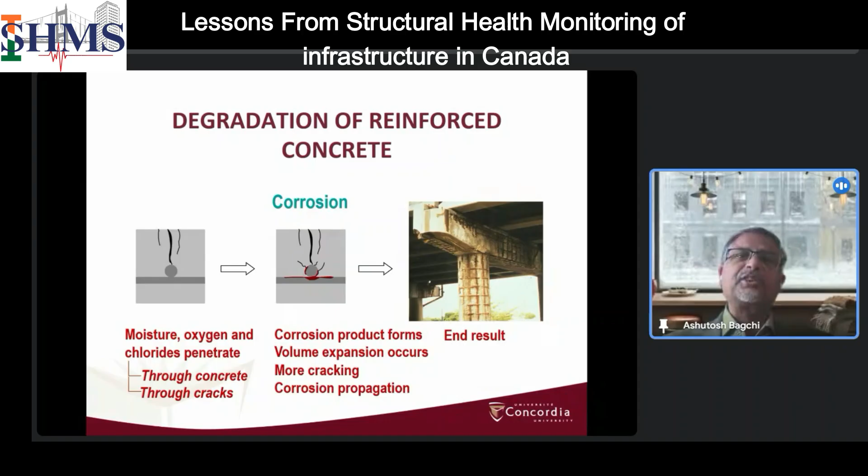You know, in concrete structures, corrosion is a very harmful aspect that we encounter all over the world, depending on the weather. In Canada, although it is a cold country, many times because of the fluctuation in temperature, the snow cleaning operations and all these things can create stress on this kind of structure, which accelerates corrosion. So when we rehabilitate these structures, we many times use modern materials along with the older materials. We use innovative structures. But to maintain these structures, monitoring is important.

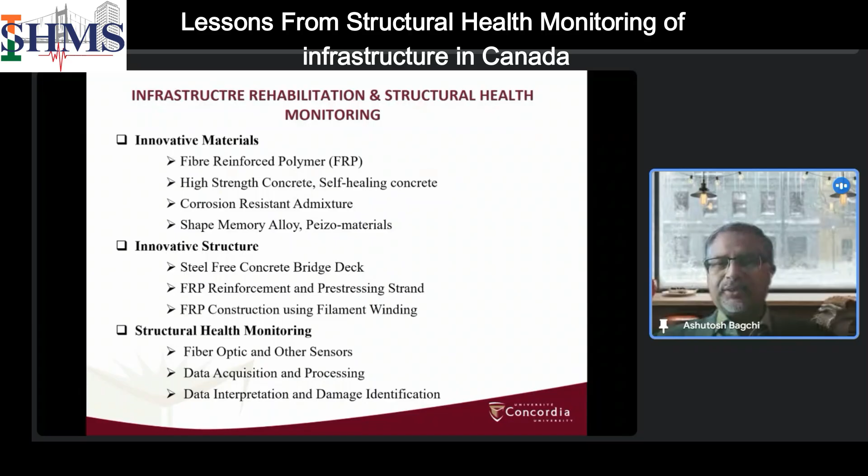So in Canada, they tried different types of innovation in structural rehabilitation or creating new structures. For example, we were using FRP materials, fiber reinforced polymer materials, early on while developing. There was no code or anything. Then they started developing the code and started using it on a regular basis. Then there is another kind of bridge construction they started doing, which is called steel-free deck.

Steel-free deck is basically, as the name indicates, we don't use any steel internally, which means that it's not fully FRP reinforced or polymer reinforced concrete. It is still concrete, but instead of using steel bars, a steel plate is used externally to promote arching action in the bridge deck. For example, in this bridge deck, there is a steel girder here and here, and there is a steel plate connecting them. So when there is a load coming from top, it tries to push these girders away, and that creates arching action. And concrete is good in taking compression. So that's how it takes the compressive force.

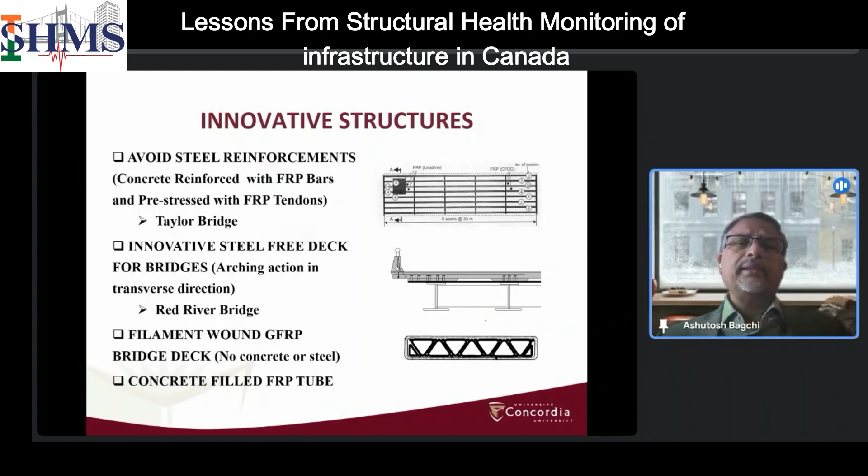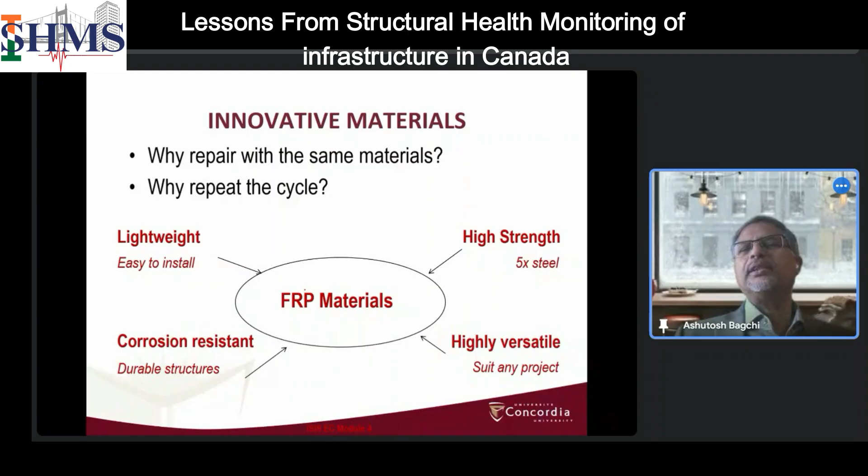Then other kinds of structures they use, like filament winding. I'm not going into details with this. So FRP materials became quite popular, but durability of FRP material was not well known at that time, because it is about 20 years ago they started. But the attraction was it was lightweight, high strength, corrosion resistant, and versatile. So that's why most of those bridges, wherever they used FRP or steel-free deck or any kind of innovation, they instrumented them.

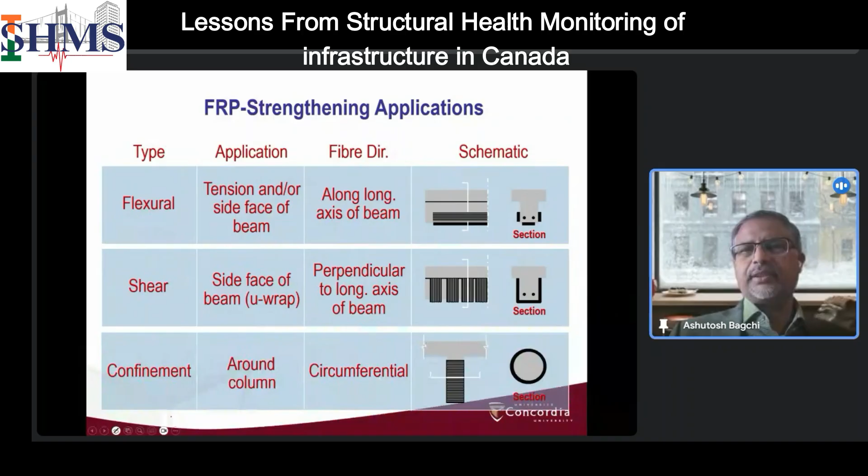So these are some of the applications for FRP where they used it for flexural strengthening. Now it is well known. Many of the countries have adopted them. At that time, it was evolving. So they were developing different layouts, different design processes, etc., for shear, confinement, etc. Now, what do we do?

Why do we need monitoring? We know that a structure deteriorates over time and exposes its deficiency, and many times it encounters excess demand. For example, some of the bridges which were designed for a certain level of load now have a higher load demand because traffic increased, congestion increased, or the speed limit increased. So that increased the demand on the structure.

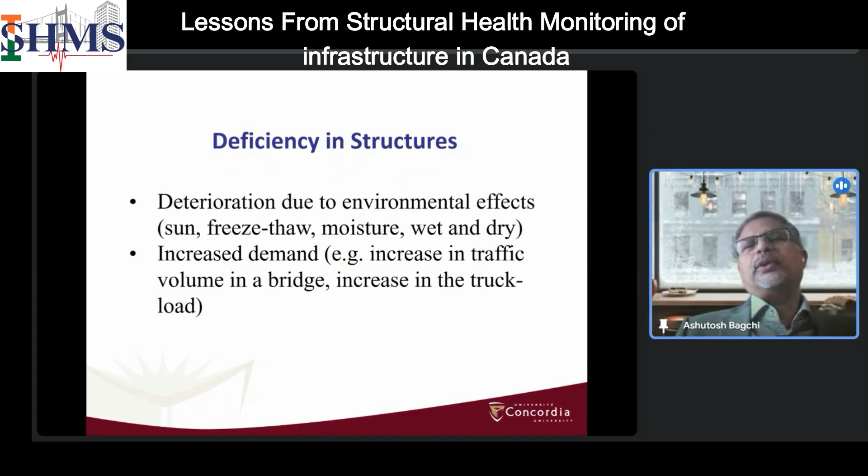Now, when the demand on the structure increases, durability and performance of the structure will get affected. When environmental effects like aging, freeze-thaw, moisture, etc. attack the structure on a continual basis, its capacity reduces. So we need to know what is going on in the structure so that we can maintain it regularly. That's why evaluation of a structure is very important. We all know this; I'm just recapping.

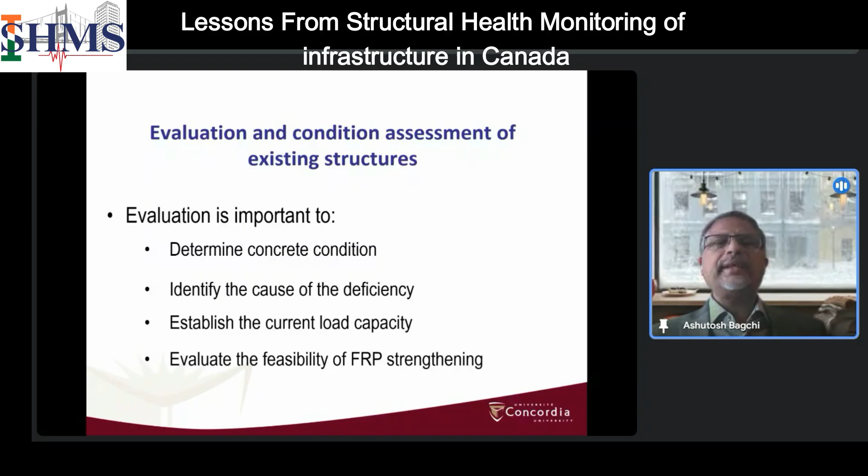This slide essentially says that when we are using innovative materials, or we want to know the behavior of the structure. I'll give you an example. Say you repair a structure with a certain kind of solution which is not standard, so you make some design assumptions. Then we need to ascertain that the design assumptions were right. The only way to know is by instrumenting the structure and monitoring its performance over time.

So we need to understand the behavior, prove any design concept we adopt, then detect possible damage or degradation. This is a regular objective in any structural health monitoring. Another important aspect is to estimate remaining service life. Why do we need to do that? Say I have a bridge which is built for a 40-year period. The design life is 40 years.

When I monitor and look at its performance, maybe after 10 years it starts showing some distress. So I do a repair. It enhances its performance and life, but it still deteriorates. So we need to estimate how long I can go on like this until I make a decision, as the owner, when to replace this bridge. That's why assessing the service life is important.

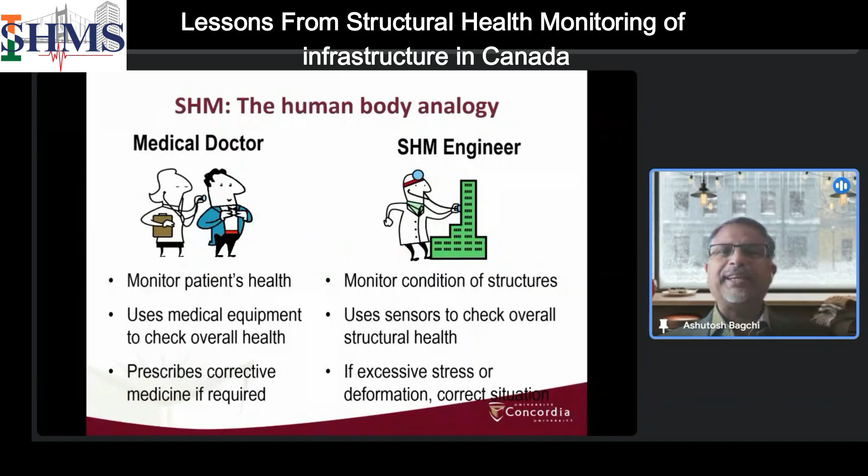I think most of you know the analogy between human health and structural health. In human health care, we take help of different diagnostic measures. We see health professionals, doctors, and based on different tests, they give us a prescription. Similarly for SHM, we monitor the structure, measure different performance or response characteristics, and based on that, the engineer diagnoses the condition of the structure and prescribes remedial measures.

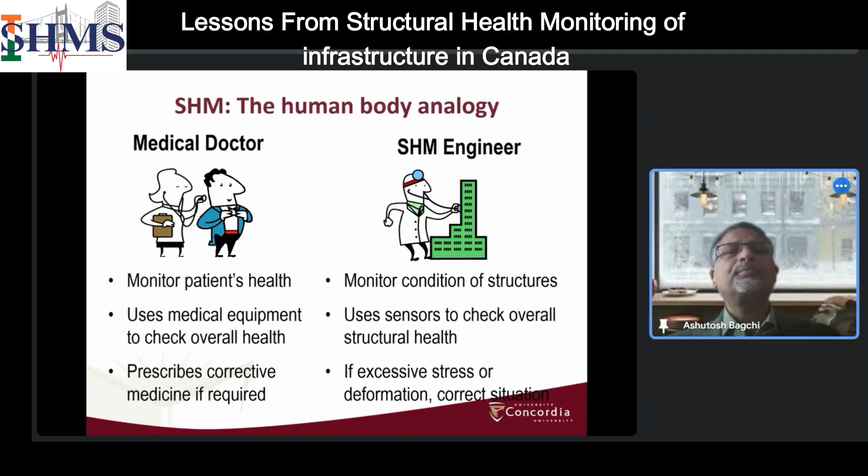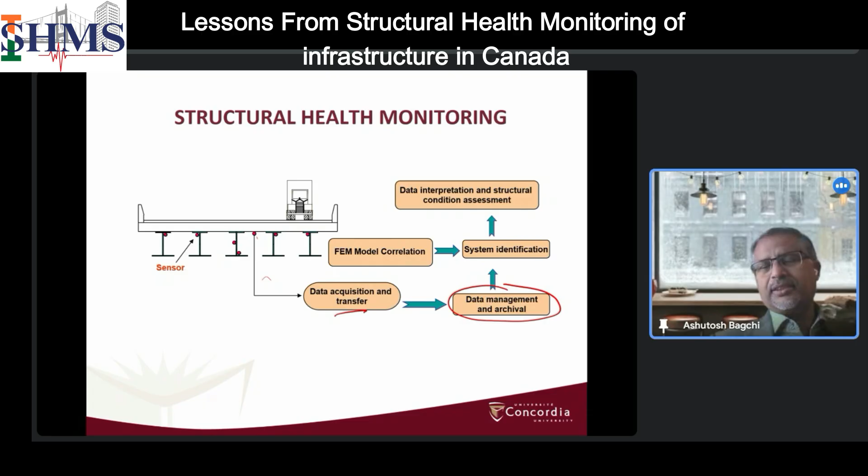This is the typical layout of a structural health monitoring system, where you have sensors from which the data is collected, managed and archived. Then system identification is done. I'll talk about what system identification is in a later slide. Sometimes we build a finite element model, correlate the structure, and interpret the data and structural condition based on what we have from the field.

So we carry different equipment into the field, like ultrasonic devices and acoustic devices, and test the structure. Sometimes we do a load test by putting a truck with standard weight and do a static field test, and collect data. Many times we do a dynamic test, meaning an ambient vibration or forced vibration test, and collect the data from that. These are all called periodic tests.

And then we come in the realm of continuous monitoring. So continuous monitoring is where we put the sensors in the structure permanently, continuously access the data, and evaluate the structural condition based on that.

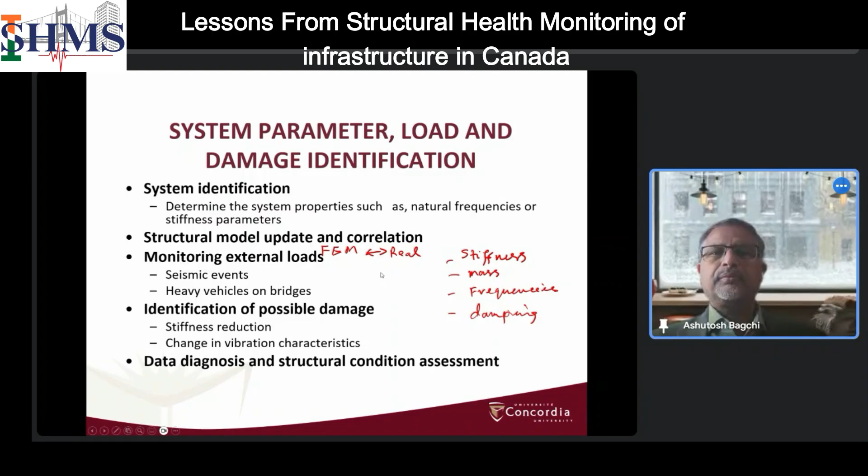So vibration monitoring is a very important technique we normally use. It is not a continuous process, it's periodic monitoring. So we take vibration measurement instruments like accelerometers, velocity meters, etc., instrument the structure temporarily and excite the structure. How do we excite the structure? Sometimes we put some kind of mechanical shakers on the structure, or if there is a natural way of vibrating the structure, called ambient vibration, we take those signals. And based on that, we figure out the system properties.

And also, if we do it on a regular basis, say every year or every 6 months, that will allow us to find the difference in behavior from one stage to another and help us localize the damage. So this is an important aspect: localize the damage based on global quantities.

If we know the damage is in a local area, we can do local tests like ultrasonic tests or ground penetrating radar or whatever we need. But if we don't know locally, then this provides a global method to identify the areas where there could be a problem. And then we can send our team to do local measurements. And that way it becomes very cost effective.

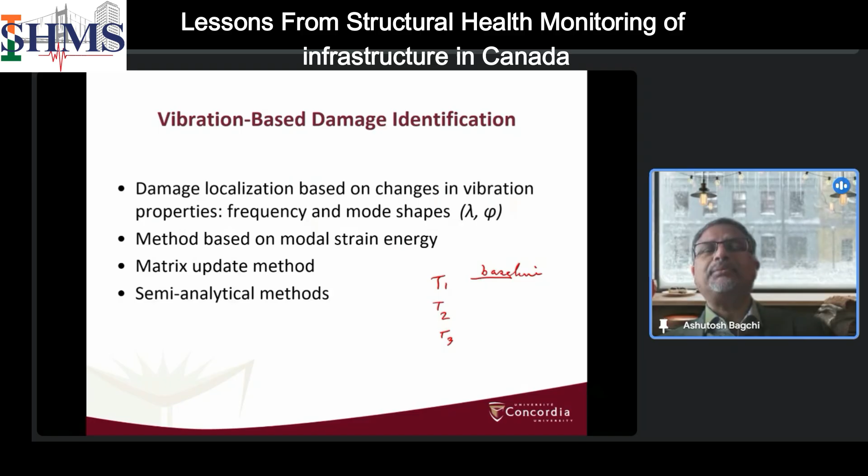It is not only for damage. Sometimes we use this to identify if there is any problem with the sensing system itself. So that is just the basic information. I'll give you some examples from Canadian implementation of SHM systems.

The time when they constructed this bridge, there was no code for this kind of bridge. Code, in fact, did not allow. But Canadian code has some mechanism. It says that if you apply any kind of new technique, then you have to prove that it does better than the conventional design. So that's why they instrumented this bridge at that time, and we are talking about 91 to 95 in that period, and try to demonstrate the performance of the structure.

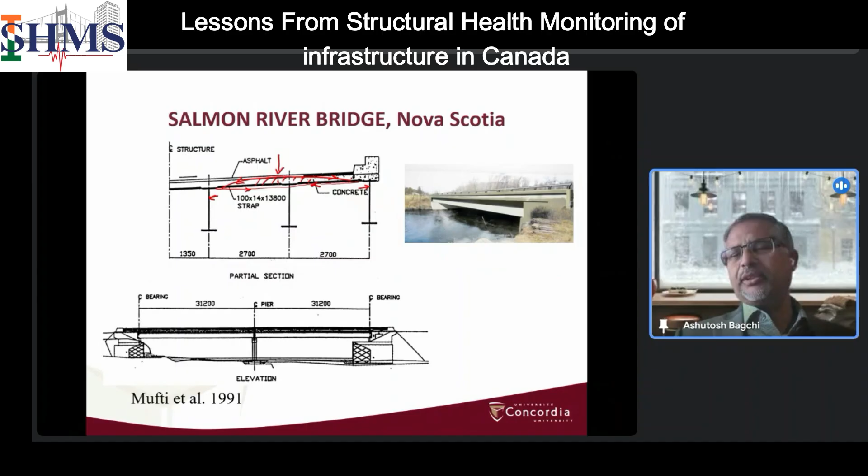So from time to time, they measured what is the load distribution in the structure. They did static load test, vibration test, and all these things. I'm not going too much into detail, but that experience was very valuable. So based on that experience, they constructed many other bridges in Canada and some in the US. And of course, design evolved a little bit over time. It got included in the code.

So that's how procedures in the code also remain live. It allows this kind of changes. Same thing with the changes with FRP. Initially, there was no design code, but allowing construction in a limited scale and monitoring and analyzing the monitoring data helped them to develop different design provisions.

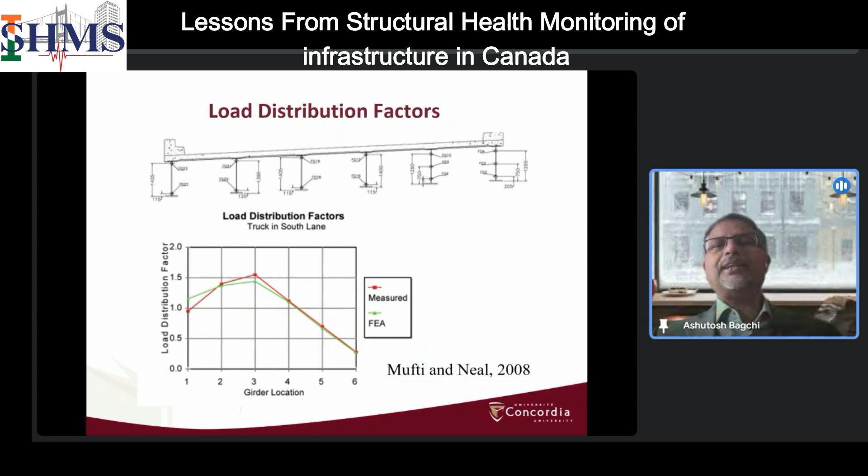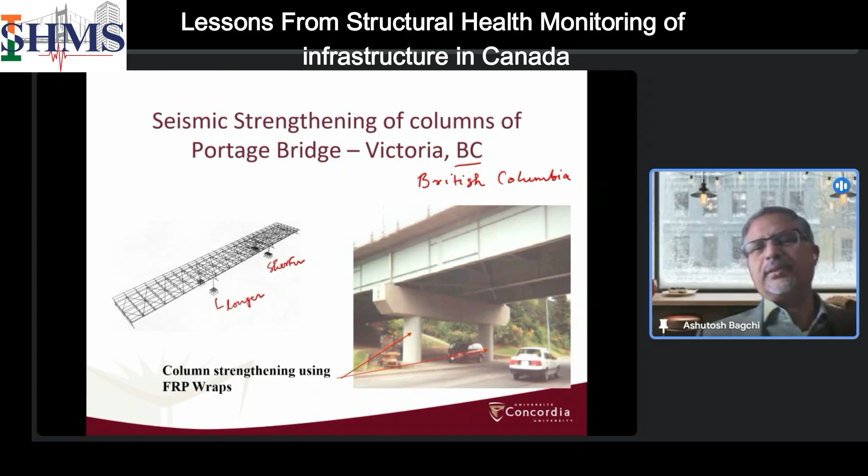So what is the advantage of that? The advantage is that it confines the core of the column. Through different tests, it is quite well known that if you confine a column, its axial load carrying capacity goes up. If it is a longer column, if the confinement is done properly in the hinging zone or the end zone, then it behaves in a more ductile fashion, because the concrete remains in one place, and the steel gets enough strain limit to yield and generate a full hinge.

This is there. See, this was in 2002 or 2003 period. They had this online monitoring system where they could access and process the data from a remote location.

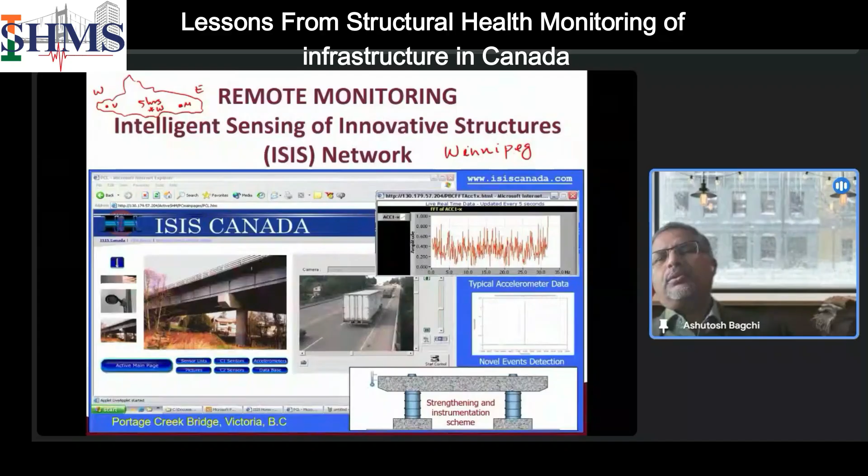So there was a network of centers of excellence in Winnipeg. Winnipeg is in the middle of Canada. Canada is a very big country in terms of land mass, right? And it is a little bit longer. So it looks like this. So this is east, this is west. If you take a flight from here to here, so this is Montreal and this is Vancouver, it takes 5 hours. So you can imagine how much longer it is. So Winnipeg is right in the middle. And they had this center of excellence where they had this monitoring station, and the bridge was in Victoria. So it worked out well at that time.

They also did field tests from time to time, doing static load tests. So they would run a truck with predefined load very slowly on the bridge, and then see what is the level of strain change in some of the girders. So they would measure this in each girder, and that will help them to find out what is the load sharing between the girders, because load sharing is an important aspect in bridge design, particularly when you design multi-girder bridges.

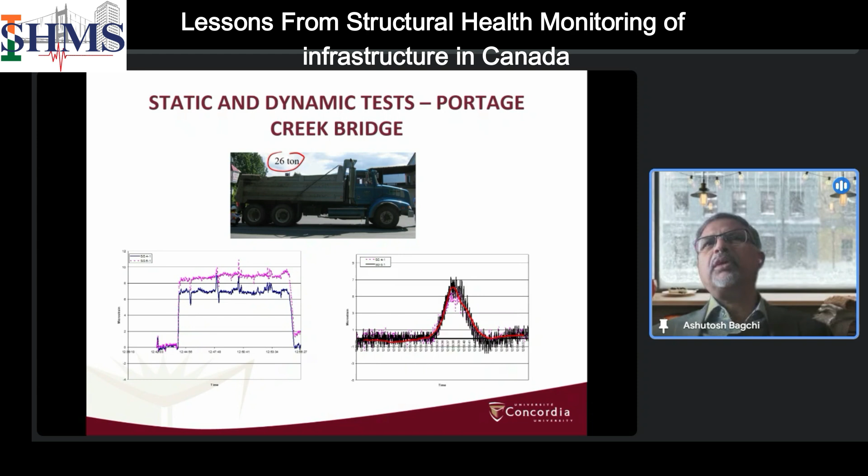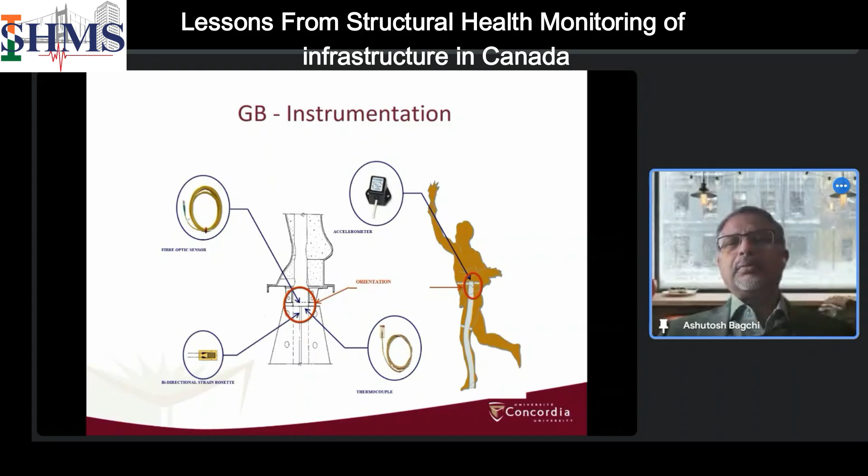Now, the reason why this project was significant is this is one of the very early SHM applications in Canada. SHM in the modern sense, like using fiber optic sensors, wireless sensors, and those kind of things. So these are some details of the structure, and then they monitored the structure for more than 5-6 years to ascertain that all the repair works were in good shape. They correlated with wind, correlated with regular ambient vibration, and all kinds of things.

And that is the time they started applying fiber optic sensors in civil engineering structures. At that time, fiber optic sensors were not very popular. They were very expensive, and not very well tested. So these are some of the early pictures from there. They also tried to create something called a rugged version of FOS, fiber optic sensors, because fiber optic sensors are very fragile.

So it is like a simple fiber coated under different kinds of jacketing mechanisms. As long as it is protected within these plastic jackets, it is okay. But the sensor part is usually exposed, and they are very brittle. So that's why installing in the field is very, very tricky. If it is not installed properly, then it will not work, so all the expenses will go to waste.

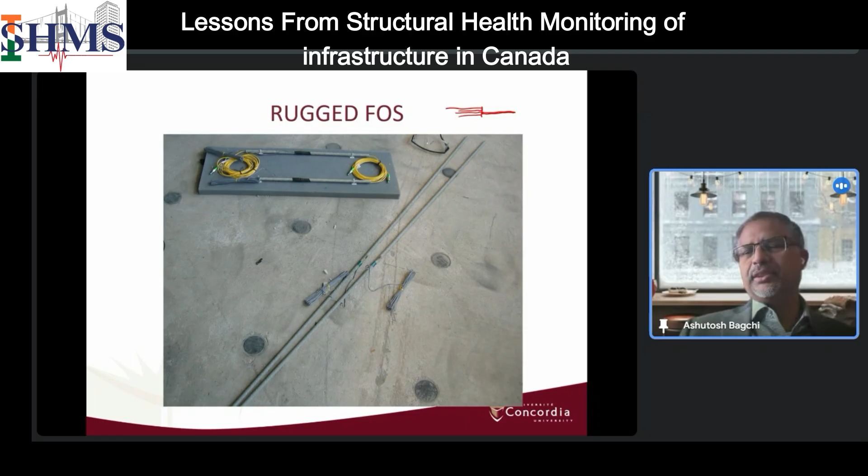So they tried different ruggedizing mechanisms, meaning pre-install in a different setup and just plug in at the site and all these things. Obviously, they needed to study its efficacy and performance. These are some of the tests they did in the lab. We also did something in our Concordia labs.

And what we also did is weathering effect, because Canada is a country which sees extreme weather. Extreme weather means in summer season it is quite hot. It could be 35, 40 degrees sometimes, not all the time. In winter time, it could see minus 20, minus 30 even. Not for extended periods, but minus 15 to 20 would be almost regular.

So in that kind of temperature variation, we need to know whether this kind of sensing system, monitoring system, will even work outdoors. So there were some tests to figure out the durability of these kinds of sensors.

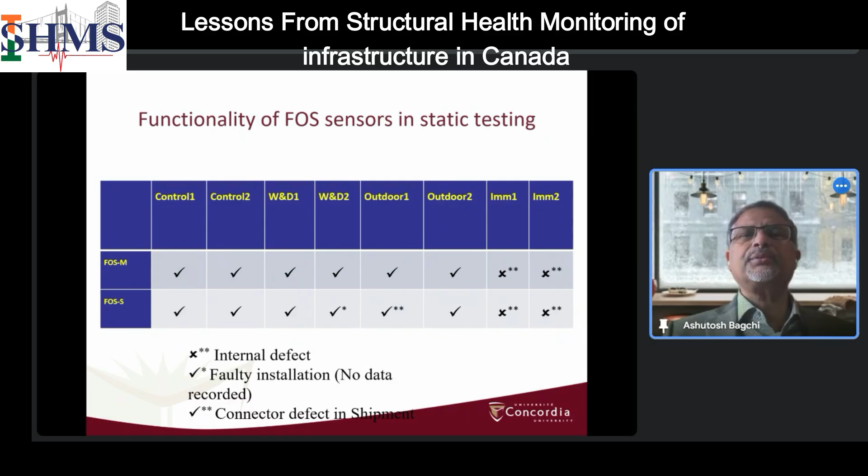And also in fatigue condition, like especially if you look at a bridge, it undergoes cyclic load. Like every time a truck passes, the bridge midspan deflects, and then the truck goes away, it comes back. And because these are dynamic loads, there is also some kind of vibration that happens followed by the passing truck.

So because of that, it might set in some kind of fatigue, especially in reinforced concrete, not so much in FRP reinforced concrete. There could be significant effect on this kind of fatigue load. Steel bridges have more effect because steel is known for its fatigue problem.

So the tests indicate that yes, FOS in all kinds of conditions, like in control conditions, wet and dry, outdoor, meaning summer and winter, immersed in different kinds of solutions, they perform quite well. So durability wise, FOS seem to be good. These are two different versions. One is directly installed. This is installed on a supplemental bar. And these are traditional sensors, electrical based, which sometimes work, sometimes do not work, especially in extreme conditions.

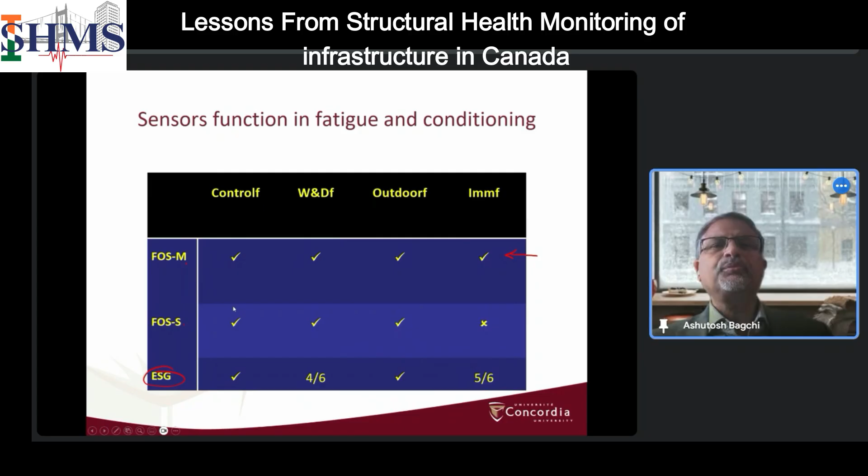We also did some research on application of SHM systems in large structures like dams. Now, in a massive structure, environmental and seasonal effects change or affect the outcome of the monitoring system quite drastically. So we need to figure out a way to extract or isolate the environmental effect. So there are many different techniques.

We could use statistical methods or artificial neural network methods to isolate the effects. Analytically, some people tried using the existing theories of thermal expansion, etc. But that could account for only temperature-related issues, but not other things.

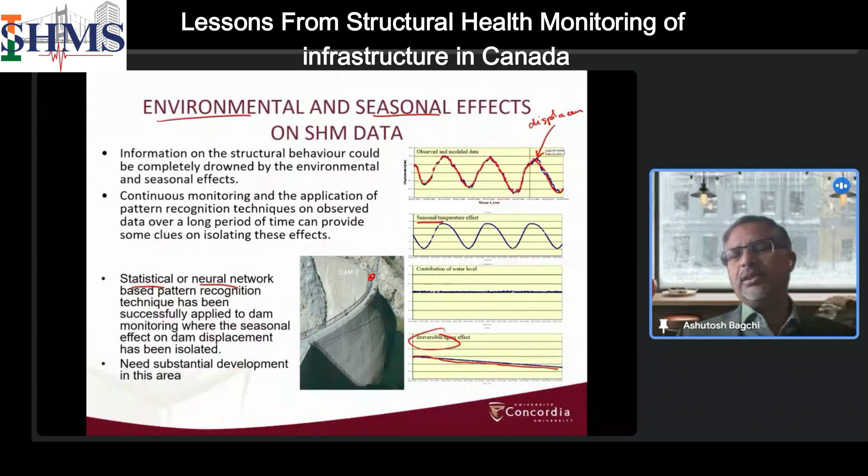So this kind of monitoring gives us good information in terms of the structure's operational behavior and the long-term drift in its performance.

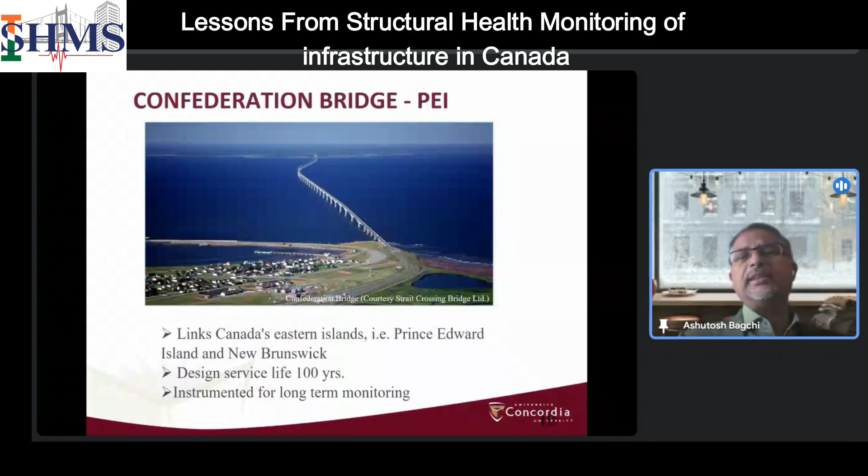This is an iconic bridge in Canada. It's in Eastern Canada. It's called the PEI Bridge. PEI is Prince Edward Island. It's an island in the east of Canada, which is around 13 kilometers away from the mainland. So the only mode of communication was ferries. But then in around '97 or so, they constructed this bridge connecting the mainland to this island. It's called Confederation Bridge. And some of the critical spans of this bridge are instrumented for long-term monitoring.

Now, long-term monitoring helped maintenance of this bridge in a big way, because when this bridge was constructed, many of the things they didn't know. They assumed that this is how the bridge will behave, or the environment will react to the bridge in certain ways. So they devised solutions in anticipation.

But since they monitored, they could now validate or update. Say in the winter time, part of the ocean freezes around this. And in some of the areas, it may freeze, but not fully freeze. So the ice blocks will move along this. So when it moves, you see these piers, it will hit the piers. So they had to account for that also: what is the deterioration that can happen because of moving ice floe.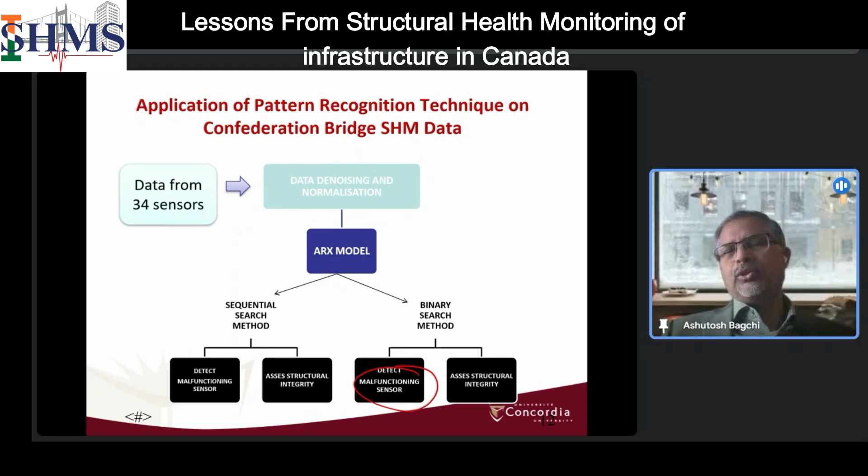So the technique basically tries to isolate based on the pattern. Say we have a structure, a bridge, let's say, and we have sensors at different points. So when this bridge deflects, these sensors will give us corresponding information, right? Now, suppose out of these three sensors, this one gives different output, then obviously visually we can say that something is wrong, either with the sensors or at the location of the bridge.

Now, if the bridge is an elastic structure, even if there is damage, the post-damage version will also be sort of elastic, right? If the sensors are connected to that, maybe overall deflection will change, but not one sensor giving an abruptly different result. So from that, you can figure out that if this sensor is giving this kind of information, then there might be something wrong with the sensor. Okay. But if it gives excessive deformation, but with the same pattern, then it may be structural damage.

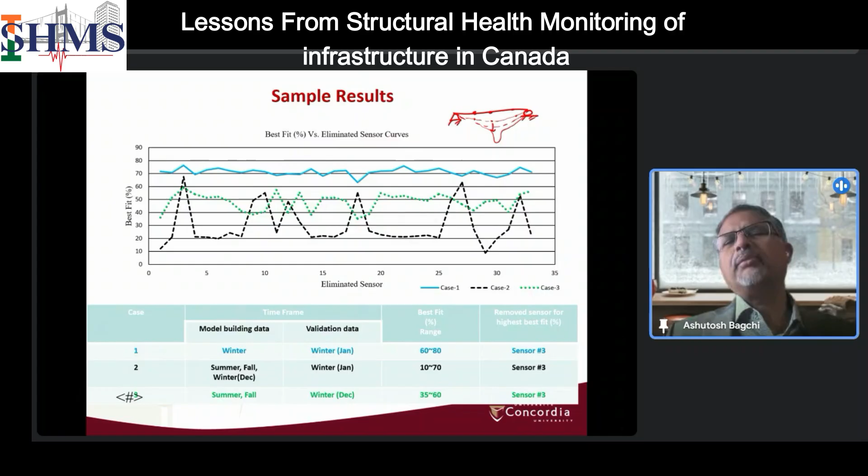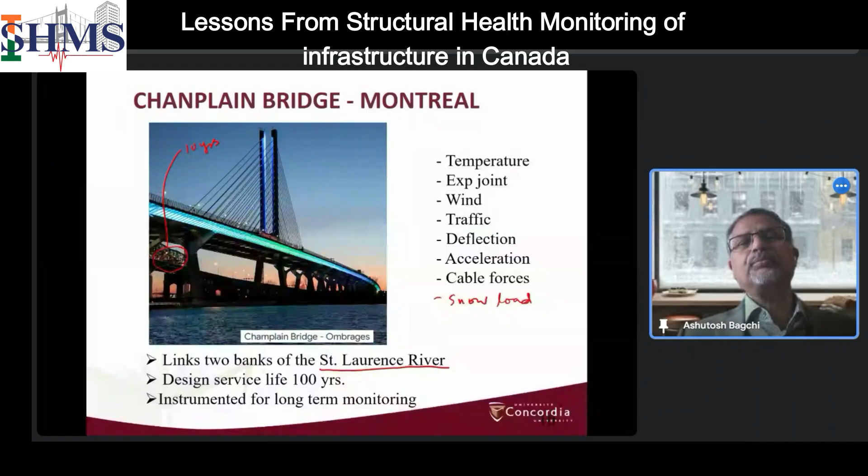We also did some tests on our campus buildings for vibration using a type of integrated sensor; it integrates an accelerometer, a velocity meter, which is essentially a geophone, and also special circuitry to amplify the low amplitude vibration, because sometimes when you measure ambient vibration the amplitude is very low, so sometimes the data integrity is compromised, right? Or the noise kills part of the data. So there is inherent hardware level amplification of the vibration data.

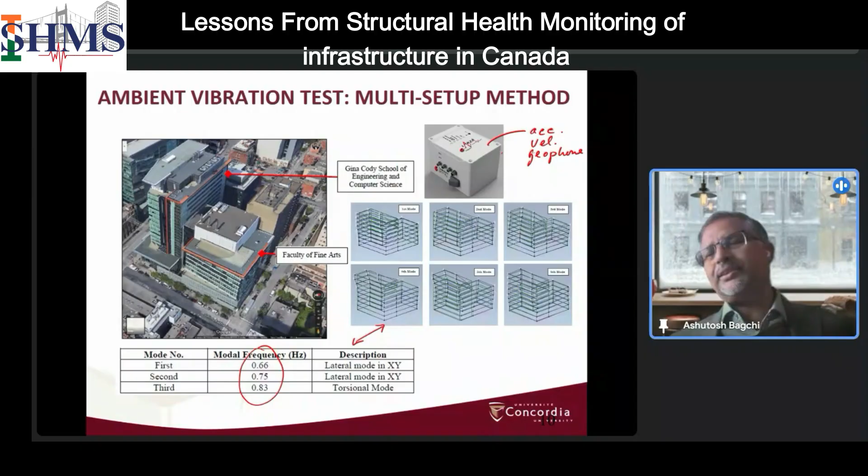So from that, we use different system identification methods to calculate the frequencies and the mode shapes. Okay. Since this is done for the first time, the only way to verify is the finite element model. Okay. So the other way to do it is repeatedly measure it, and see that there is consistency among the results.

Now this is a snapshot of the activities here. There are many other projects. I know it's not important to bring everything, just to give some snapshot. But what is important to recognize, what are the challenges in these kind of projects? Some of the challenges were recognized early on and they tried to mitigate. Some of the challenges are still being recognized.

But some of the major challenges that were recognized early on is optimal selection of sensor type and placement. That means if I want to monitor a structure, what kind of sensors I need and what kind of parameters I need to monitor and where we'll place this sensor. Okay. If I have a damage type and location well known, then I have no problem. I can select the appropriate type of sensor, location is known, that's okay. But generally speaking, we don't know many a times because the overall structure looks good or bad, okay?

But to monitor it in a scientific way, we need to find a mechanism to install the appropriate type of sensors in appropriate locations. So I think that can be done with modeling, simulation to know the structure well before we decide that these are the critical points where the sensors need to be installed.

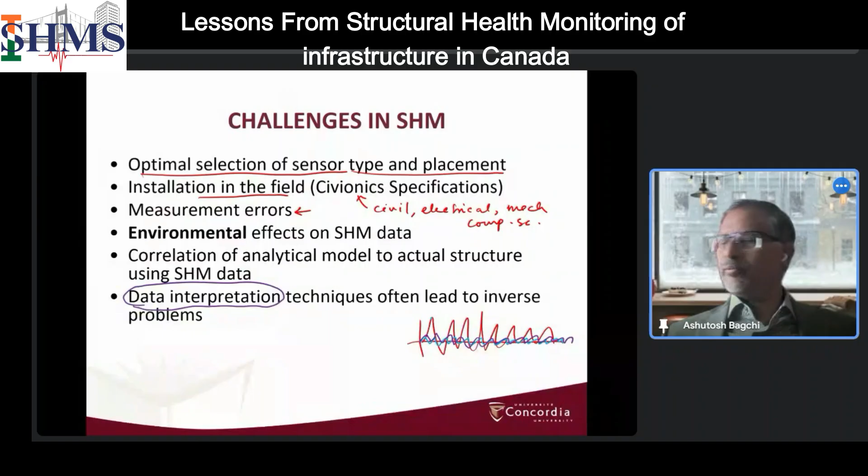How to use SHM information? We can use it in different systems. In bridge management system, if it is related to bridge. Dam safety assessment system, if it is related to dam, and so on. Data fusion is often a necessary thing. Data fusion means you have different kinds of data, like inspection data, vibration data, strain gauge data, all kinds of data with different ranges and behavior. How do we fuse all this information to interpret the data appropriately? And the final objective is this: condition assessment and prediction of remaining service life. Many a times we can use this as life cycle assessment, not just costing, I would say assessment.

So what does it mean? You have a bridge built for 60 years, but at the end of 40 years, you see problems, right? So if you demolish the bridge at this point and reconstruct, it will cost some money. But if you can, through SHM, extend it to really 60 or 70 years and then construct, then it has a different cost.

Let's say reconstruct here, so it has C1, and reconstruct here, it has C2. Then you compare on a yearly basis which one is cheaper. You will always find that this is cheaper. Okay. So that gives a justification of extending the life. So real-time assessment or continuous assessment is always helpful.